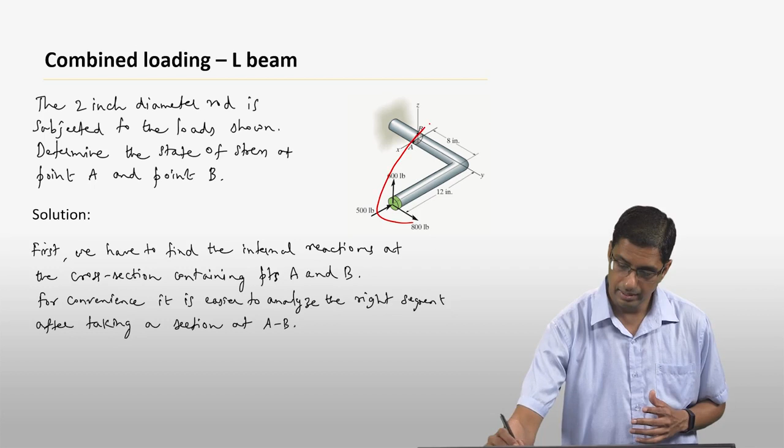If you make a section here and consider the left segment, first you have to find the reactions at the support and then analyze the problem. But if you just analyze this part after you take the section, you don't have to find the reactions at the support. That's why we are going to look at the right segment.

Now, to find the reactions at a particular cross-section, there are again multiple ways. One is to find the moments and forces directly. For example, to find the moment at this section, take the formula for moment, which is R cross F. The force is combined of three forces, Fx, Fy, and Fz, so you can find the F vector. Then find the R vector from the middle of that cross-section, do R cross F, and find the moments.

Okay, that is one way of doing it. It is good to do that, but usually it becomes more complicated when you have stresses or forces acting at multiple points. Then you have to do an R cross F for every set of forces.

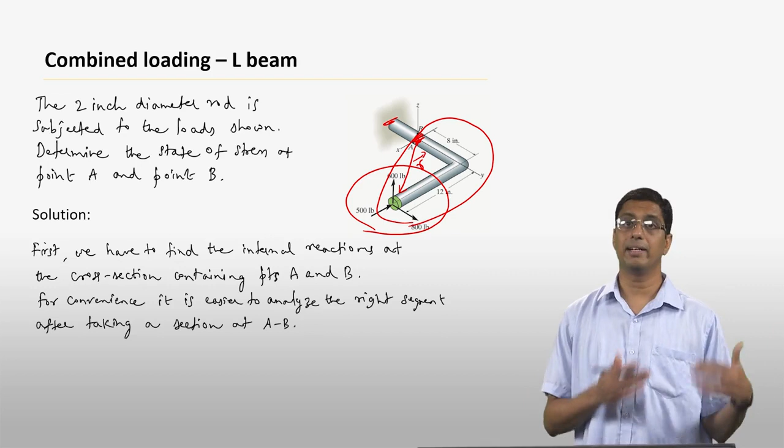So what we'll do in this particular problem is actually try to figure out what types of forces and moments each one of these forces are going to cause separately, and then analyze it. It takes a few more calculations, but the reason that we're doing this is because you get a good intuition of what kind of forces and moments a particular kind of force provides, and what kind of stresses will actually come out of those moments and forces.

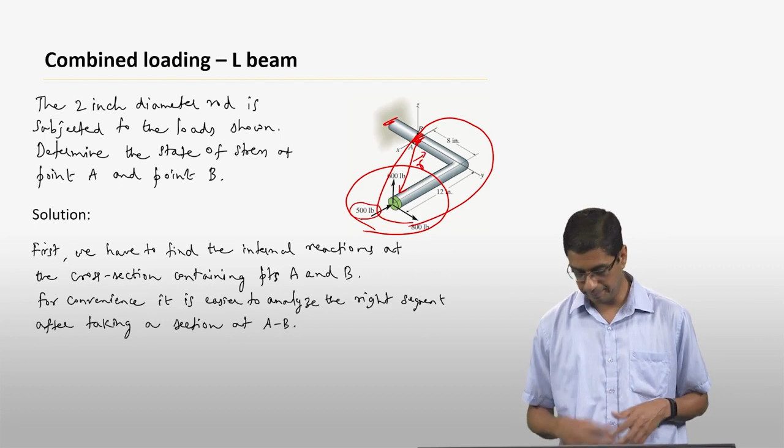So essentially we're going to look at the effect of each one of these forces separately and figure out what kind of stresses they will cause. Again, this is a little bit longer, but it helps you gain intuition on how to solve this problem. So let's go ahead and do that. First we are going to look at what kind of forces and moments will be caused by each one of these forces.

So first let's look at the 600-pound force here. What we have done is that we have made a cut at this point and isolated this body, which is what is shown here. Now if you look at this free body, it is very easy to find out what the internal forces are going to be. Whatever the direction of the applied force here, the force there has to be in the opposite direction because it has to be in equilibrium. So if you have a 600-pound force acting upwards here, there has to be a 600-pound force acting downwards there, just to satisfy force equilibrium.

But if you want to look at the moment equilibrium, then we have to think about what kinds of moments each one of these forces are going to cause at that particular location. I have assumed specific directions for the internal moments here. I am assuming that the Mz at this point is pointing up, the My at this cross section is pointing to the left, and the Mx is pointing in this direction. If my assumptions are correct, I'll get a positive value. If they are wrong, I'll get a negative value, and then you can always change it.

Now let's look at each one of these forces separately. If you look at the 600-pound force here, what kinds of moments will it cause? The first thing to notice is that if the force is along the z direction, it cannot cause a moment in the z direction. So the 600-pound force will not cause an Mz; it can cause only an Mx and an My. In this case it will cause both, because about the x-axis there is an arm of 8 inches, so it will cause an Mx. Similarly, it has an arm of 12 inches about the y-axis. So this 600-pound force will cause both an My and an Mx.

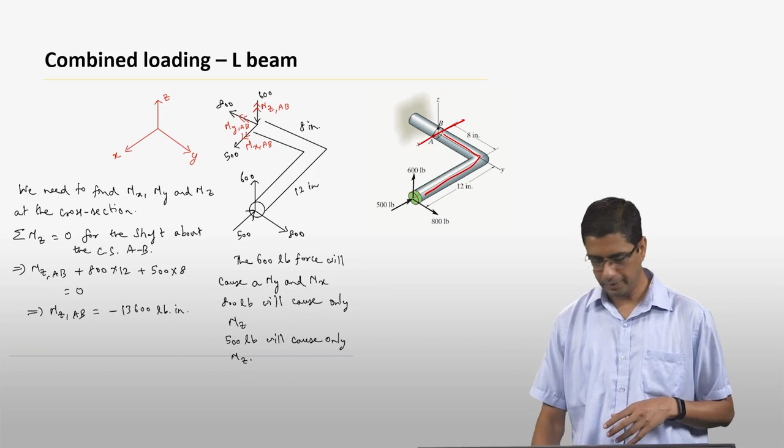So we can do the same thing for the moment about the y-axis. You again go through which particular forces are going to cause an My, then you use that equation and you find that My is going to be minus 7,200 pound inches. Again, it means that the moment is not going to be in this direction, but actually in that direction.

And you do the same thing for the moment about the x-axis, and you find that Mx also turns out to be negative, which means that the moment is going to be pointing in that direction. That is going to be the direction of Mx, and the value of that moment is going to be 4,800 pound inches. Okay, so here there's something very important that I want to emphasize.

When we did this problem and looked at the right segment here, we made a cross section, and we are looking at this cross section. At that particular cross section, you basically have these values. But when you take a section, you actually create two surfaces, right? And this is a surface that is still attached to the base of the L-shaped beam.

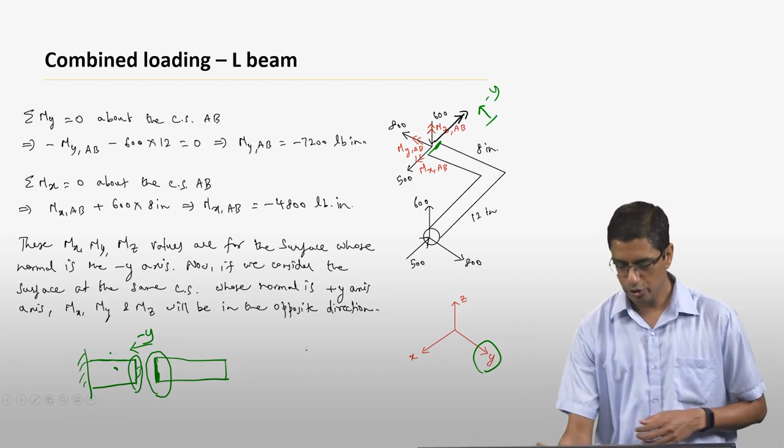Now if you look at the opposite section here, then the moments that you calculated are exactly going to be in the opposite direction. This is something that you should have learned in your statics and definitely in your solid mechanics. If you take a free body, take a section, and look at these two segments separately, the direction of the internal forces in these two segments are going to be exactly opposite.

So if there is an My like that here, then there has to be an My like that there. Only then the equilibrium will be preserved. So that is something that I want you to keep in mind. If you take the section whose normal is the positive y-axis, not the negative y-axis, then all these values that we got here will be reversed. That is something that you must keep in mind.

So now what I have done here is I have drawn the section whose normal is the positive y-axis, and in those cases, all these signs will change. So here we have minus 4,800 for the x. That becomes positive 4,800 here.

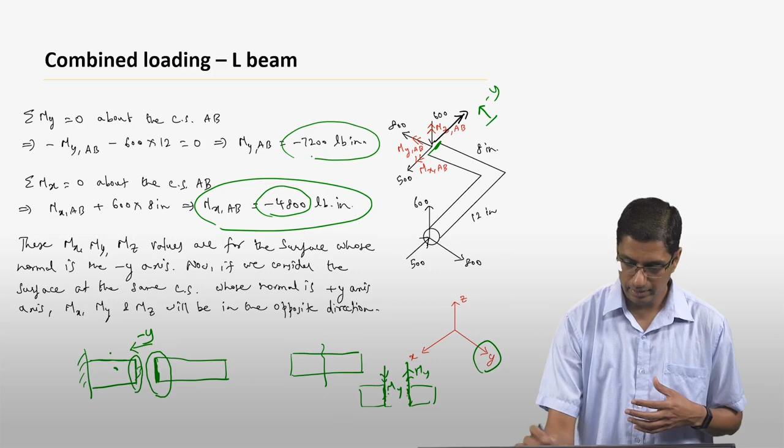Okay, so mz was minus 13,600. Now it is plus 13,600. Okay, and my, which was minus 7,200, which is going in that direction. Now it actually becomes an my that goes in that direction.

It's the opposite direction. Okay, so whatever I have drawn here is basically the cross section to the left, and I have drawn each one of these moments with the right sign or the right direction and the right magnitude. So essentially you can think of this as the cross section that you're analyzing now, and these moments my, mz, and mx are with the right magnitude in the right direction. Okay, now we can find out what kind of stresses they are going to cause.

Okay, now if you think about point A, there is going to be a force, which is 800 pounds here, that comes directly from the force equilibrium. That is going to cause a uniform axial stress across the entire cross section. So whether it is point A or point B or any other point in the cross section, there is going to be an axial stress just because of that axial load. Apart from that, you are going to have stresses due to the moments.

One thing that I want to emphasize is that there are also two more forces, which is this 500-pound force here and the 600-pound force here. Those forces are shear forces. And in this particular class, we neglect the effect of direct shear forces. We only take into account the effect of the axial forces and the bending moments and the torsional moments. So this 500-pound force and 600-pound force we are going to ignore.

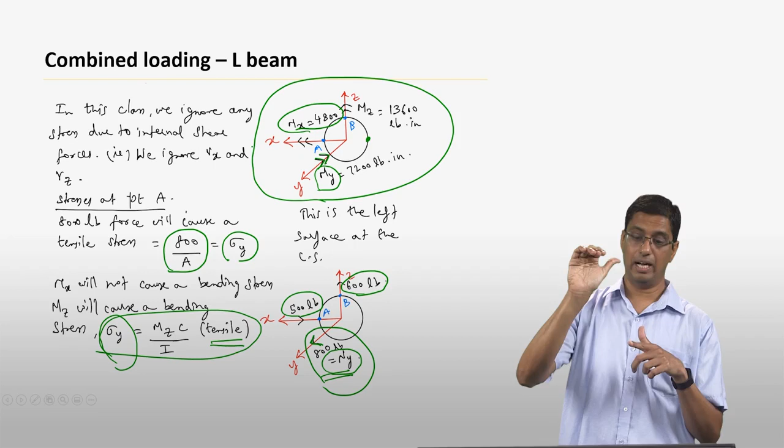So for Mx, you have to think about what kind of stress it is going to cause. If you go back a little bit, we know that Mx is positive. It is 4,800 pounds. So put your right thumb along the direction of Mx and curl your fingers. If you do that, you are going to be pushing into point B, which means that the bending stress at point B due to Mx is going to be negative. That's why you have this negative sign here. It's going to be minus 4,800 times c, which is 1, divided by I, which is pi over 4.

And of course, you're also going to have a torque, which is My, and that will cause a shear stress. The torque is going to be the same across the entire cross section, and that is going to be 7,200 pounds. If you look at the cross section here, remember the torque is in that direction. This is your z direction, and that is your x direction. So if you look at point B here, the force is going to be in that direction, given the direction of the torque.

So if you look at that particular case, the normal is still going to be the positive y-axis, but the direction of the force here, due to this torque, is going to be along the minus x-axis. That is why your tau yx is actually negative. At point A, tau yz was positive, whereas tau yx at point B here is negative because the direction of the force is in the minus x direction. But the value is still going to be the same. It's still going to be 4.584 ksi, it just has a negative sign.

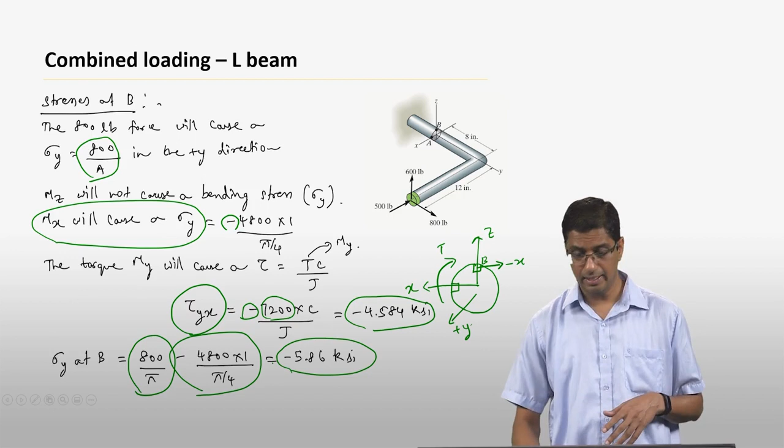Now, if you want to find the total normal stress at point B, you have this contribution from the axial force, and then you have this contribution from the moment, Mx. If you add them together, then you get a value of minus 5.86 ksi. So now what you see is that the stresses at point A and point B are different both in magnitude and also in terms of sign. At point B, the normal stress is negative, minus 5.86 ksi, whereas the stress for point A is positive, and it's a different value, which is 17.6 ksi.

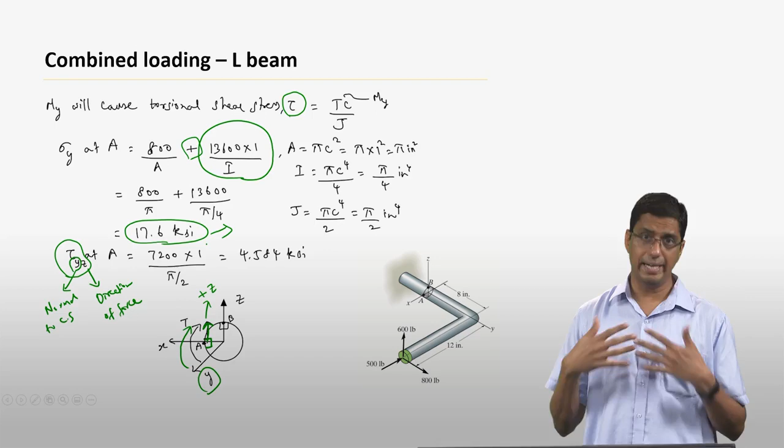So now we have essentially found the normal stress and the shear stress at two different points in the cross section. You can do this for any point on this cross section in a fairly straightforward manner. Now, if you want to do it at an arbitrary point which is not located along either the z-axis or the x-axis, then we can always use the formula that we derived earlier for the bending stress. The only difference is that you now have to take into account the effect of the axial force.

When you have an axial force, it is going to cause a uniform axial stress across the entire cross section, whereas the bending stress is going to vary across the cross section. It depends on the specific location in that cross section. But once you know the formula for the bending stress, you can just substitute that particular coordinate into the equation and get the value. So I would really encourage you to use this expression, put the coordinates of A and B into that formula, and see whether you get the same values for the normal stress as from the previous approach.